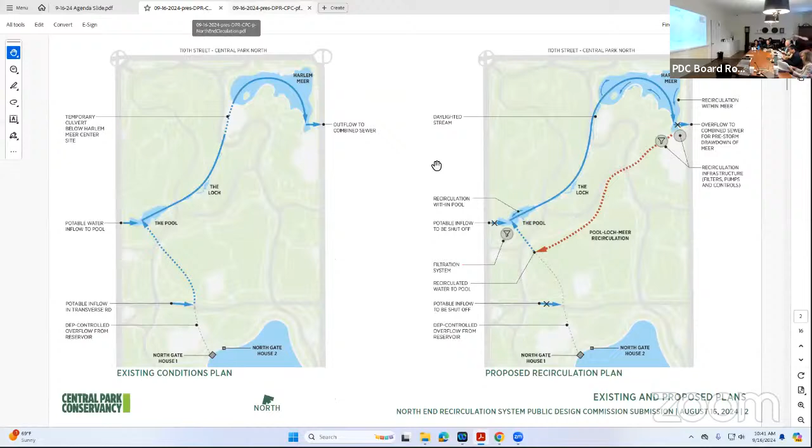Okay, we'll now continue with the public hearing portion of our meeting. The first public hearing item is number 28956, preliminary review of the construction of a water recirculation system, including adjacent site work south of Central Park North between Adam Clayton Powell Jr. Boulevard and Malcolm X Boulevard. Please note that this project is located at a designated scenic landmark, and as such, the Landmarks Preservation Commission has issued an advisory report, and the commission has reviewed and brought that report into our consideration. Per standard procedure, applicants will give their presentation, then public testimony will be heard, and then the commission will ask questions, deliberate, and vote. We will hear in-person testimony first, followed by testimony from remote participants.

We can now proceed with the presentation. Welcome. Good morning. My name is Diane Jackier. I'm the Vice President for Program Management at the Central Park Conservancy. I'm here with a few folks: Steve Bope, our Studio Planning Director; Sandy Huber, our Senior Vice President for Capital Projects; Nick Koster, our VP for Design; and Karina Bishop, one of our Program Managers. Online we also have one of our engineering consultants, Eric Rothstein from eDesign Dynamics.

So we're here to present to you the North End Recirculation Project, the first project we're going to be showing to you today. This is an incredibly exciting project that's going to be really impactful to the park. But once it's all done, most people probably won't even know it's there, because most of what we're doing is underground infrastructure.

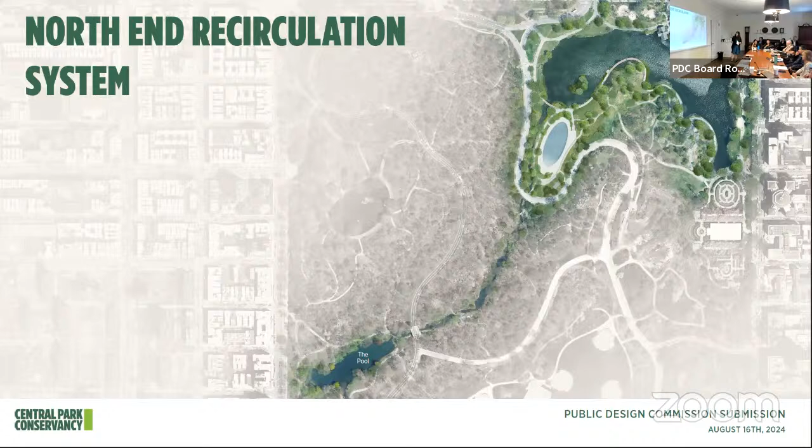To give a little history and background: the northern water bodies in Central Park, north of the reservoir, are the West 100th Street Pool, the Loch, and the Mere. Potable water comes in from the 97th Street transverse, and we also have water that comes in from 101st Street along Central Park West. The water flows by gravity through the pool, through the Loch, through the Mere, to a combined sewer on Fifth Avenue.

What we're proposing for this project is shown on the right side of the screen here, this red line. Through a system of pipes and pumps, we would pump the water instead of having it go out onto Fifth Avenue to the combined sewer—it would go back to a manhole just south of the 100th Street pool. It would again flow by gravity from the pool, the Loch, to the Mere, and just go around and recirculate.

One thing to note in terms of the history of this: what's amazing is from some of the annual reports from the Central Park Board of Commissioners, we have references to a recirculation system. Olmsted and Vaux were ahead of their time in so many ways that they were referencing an engine to recirculate and redistribute the water. Although it was never built, the idea was there.

The idea came around again in the early 2000s when the Department of Environmental Protection did a water quality management report. They were actually looking to do a recirculation system throughout the entire park. That did not go forward just because of cost and physical barriers in the park.

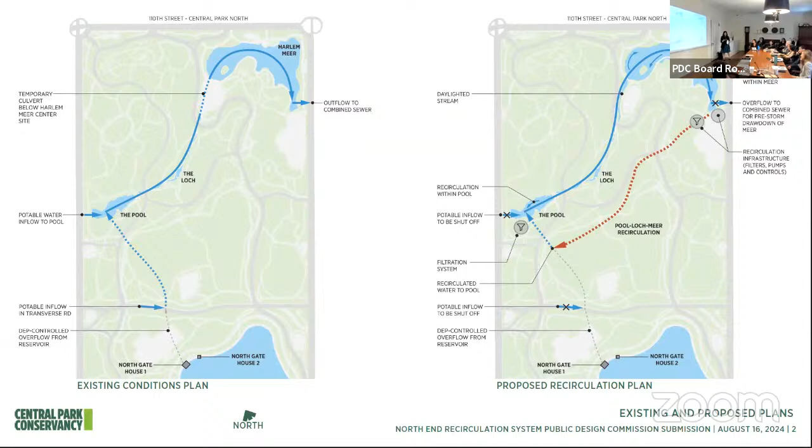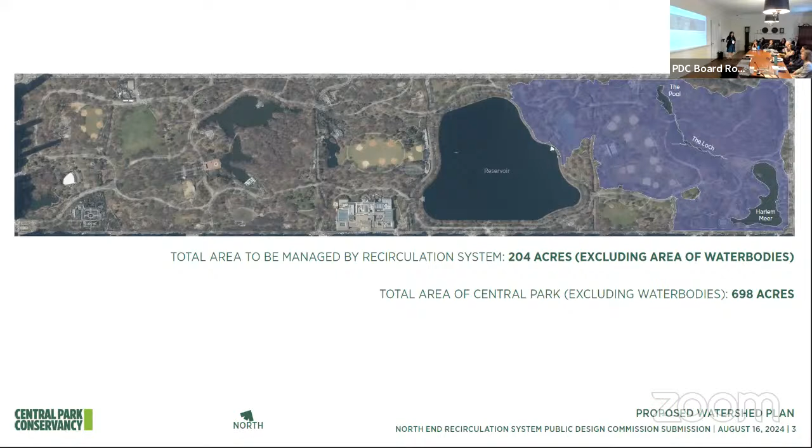One other thing: we are also going to be adding about 40 acres to the watershed here from the North Woods, about 22 acres, and right around where the Conservatory Garden is. So it'll be a total of 204 acres of stormwater that is going to be captured through this system, which is about 30% of the park's acreage.

Some of the projected benefits from this system are really impactful. We're predicting that we're going to save about 480,000 gallons of potable water a day. That calculates out to about 175 million gallons of potable water saved a year, which is pretty incredible.

Because of the system we're installing that will lower the Mere during wet weather, we're predicting we're going to save about 67 million gallons and have about a 90% reduction of water going into the combined sewer during wet weather events. This is really something we're hoping will improve the flooding in East and Central Harlem, and the models are showing that that's what it will do.

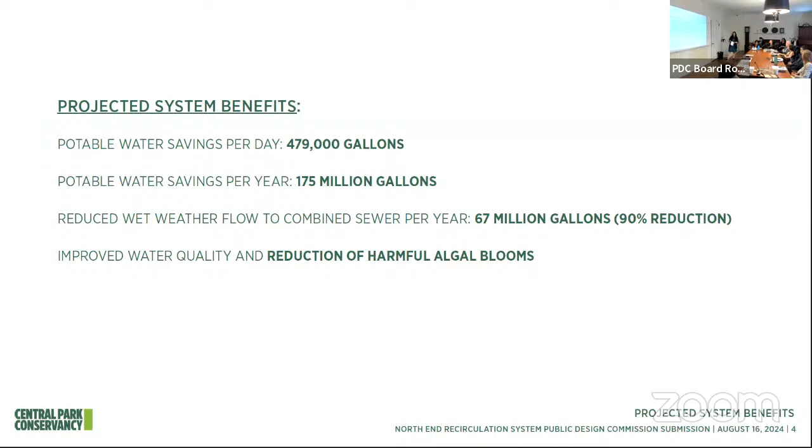Last, but certainly not least, we're looking for improved water quality and a reduction of harmful algal blooms, so we're installing those filtration systems in both the Mere and the pool. Because of the significant reduction in potable water, which has a lot of phosphorus in it, and phosphorus contributes to harmful algal blooms, without that potable water and that phosphorus we're also expecting improved water quality.

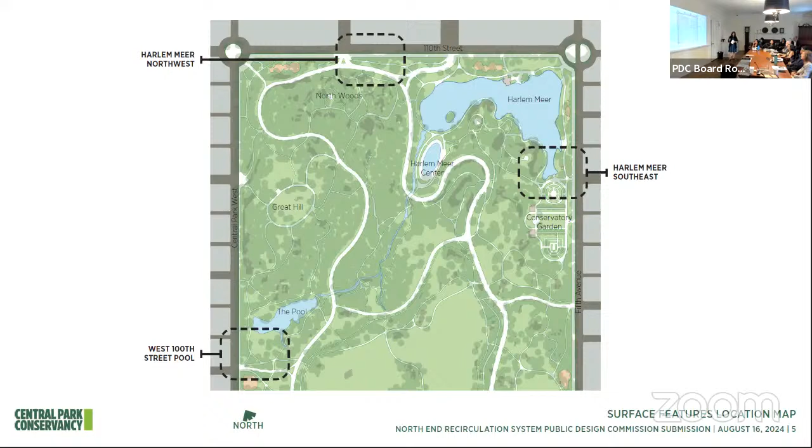Very quickly, as I mentioned at the beginning, most of the infrastructure here is going to be underground, but there are going to be a few surface area features. There's going to be some at what we're calling Harlem Mere Southeast, the Harlem Mere Northwest, and then by the West 100th Street pool. I'll just quickly go through those.

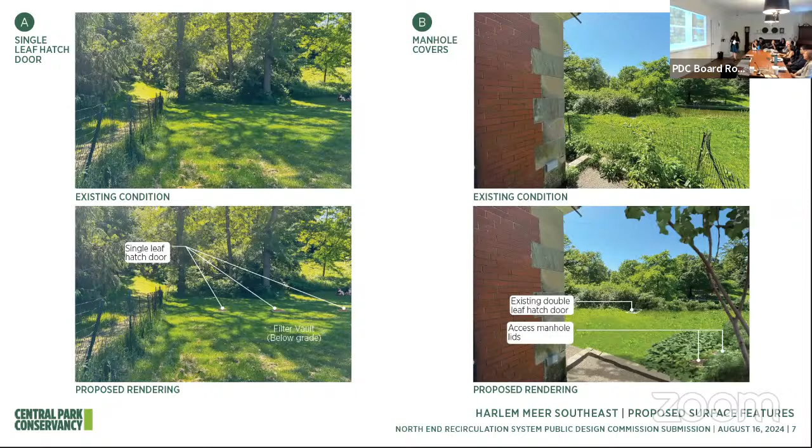So there's some hatch doors, some manhole covers. These are features that we see in the park every day. We are going to be concealing them as much as possible, and they really will be something that nobody notices when they're walking through the park.

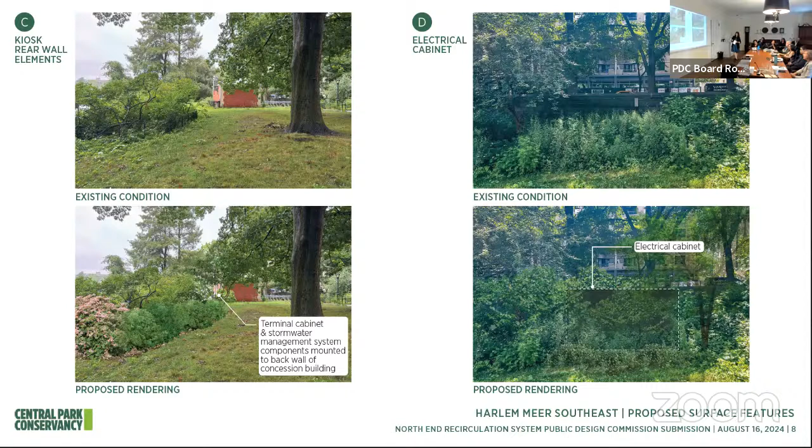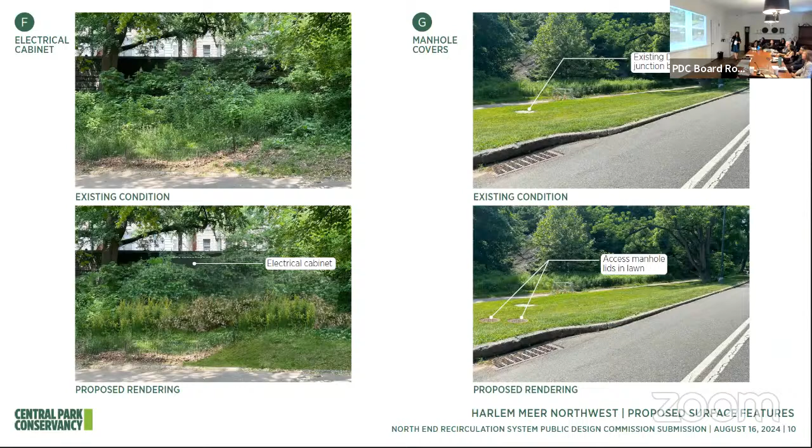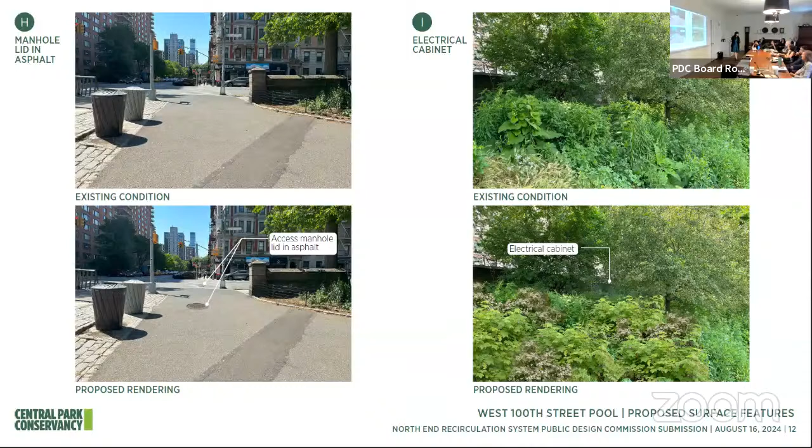And then close to the West 100th Street pool, we're going to have another filter vault underground. Some of the surface features people will see are manhole covers and an electrical cabinet, again pretty much not visible to the naked eye, and an RPZ leaf hatch door.

So just some photos of some of the plantings that we're also going to be installing as part of this project as well. And that's it.

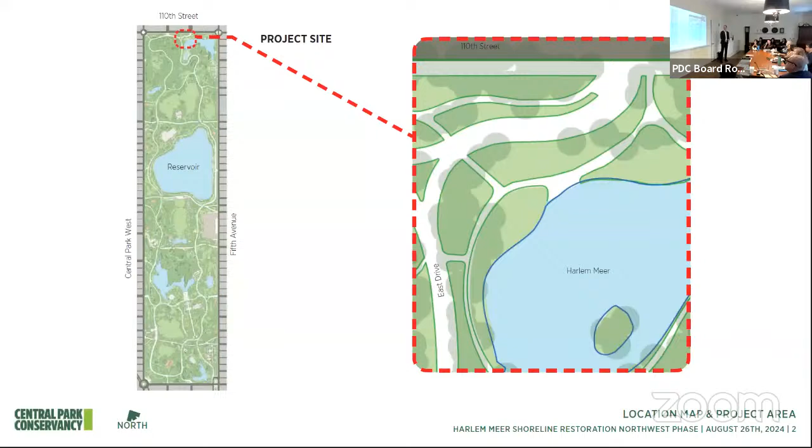As the name implies, this piece of the park is located at the northwest corner of the Meer. It's also adjacent to the former Lasker Rink, the current construction site of the Harlem Meer Center. So this is really to be seen as a continuation of the work that the Conservancy already has underway for this area of the park.

The center image that we're showing was taken a few days ago. You can see the water test that's happening for the filling of the new swimming pool. The project is moving along quite well, and we're excited that it'll be opening early next year.

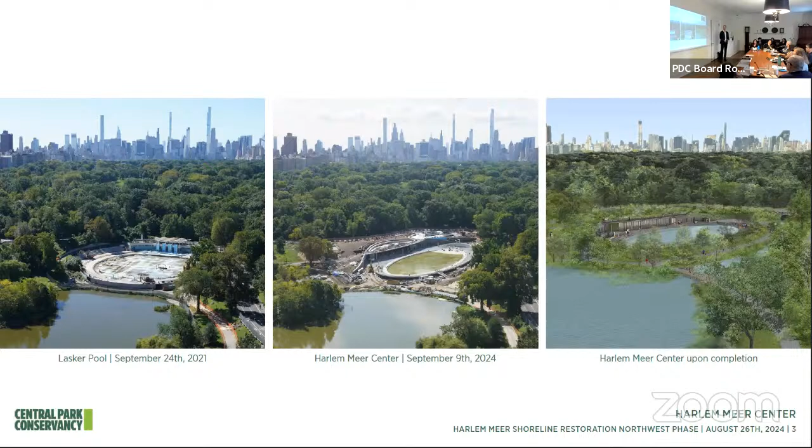The goals for this project are similar to the restoration goals of the Harlem Meer Center as well. We're really continuing to restore the shoreline to its naturalized edge. We will be supporting wildlife habitat and creating accessibility around the entirety of the Meer as part of this phase of the master plan project.

The area of the Harlem Meer in the park is an area that Olmsted and Vaux had advocated for adding to the original plan of the park, from 106th to 110th Street. The reason why was for its unique natural features, the ability to create the Harlem Meer being one of them. The photo on this slide shows what this area of the park historically looked like.

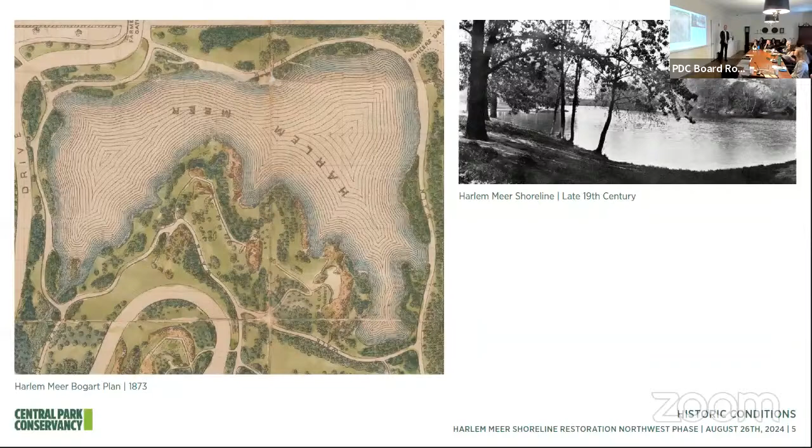Over time, through the 20th century, this was an area that had a lot of Parks Project interventions: the hardening of the shoreline, the addition of a wall, the creation of the boathouse, and the extension of the shoreline path around the southern edge of the Meer.

This was an area that in the 80s, like most areas of the park, had fallen into great disrepair. It was one of the areas that in the early years of the Conservancy took on for design and restoration. In the 1990s, this area underwent a huge transformation. The shoreline was naturalized, the paths were restored, the old boathouse taken down, and the Dana Center was created.

As it is 30 years later, across the shoreline, we have phragmites that have established at the edge. The paths are in need of repair, so now is the time to come back and work through restoring the entirety of the shoreline.

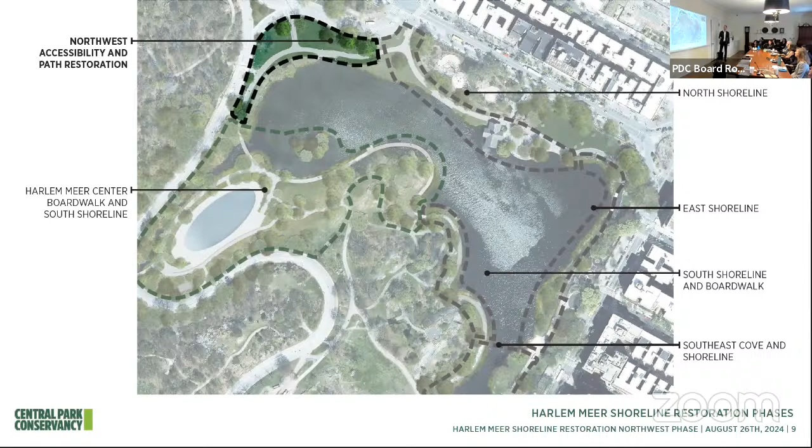This slide shows the Harlem Meer Center, the project that's currently underway, outlined in light green. As mentioned, it'll be a phased project. We see the Northwest Accessibility and Path Restoration as being the first of 5 phases of work that will proceed as funding becomes available around the Meer.

In terms of accessibility, this piece we're sharing today will be connecting and creating accessible paths to the Harlem Meer Center, as well as up to the 110th Street Playground from the drive, and the park entrance here. When the master plan is complete, we'll have accessibility created to the entirety of the program surrounding the Meer.

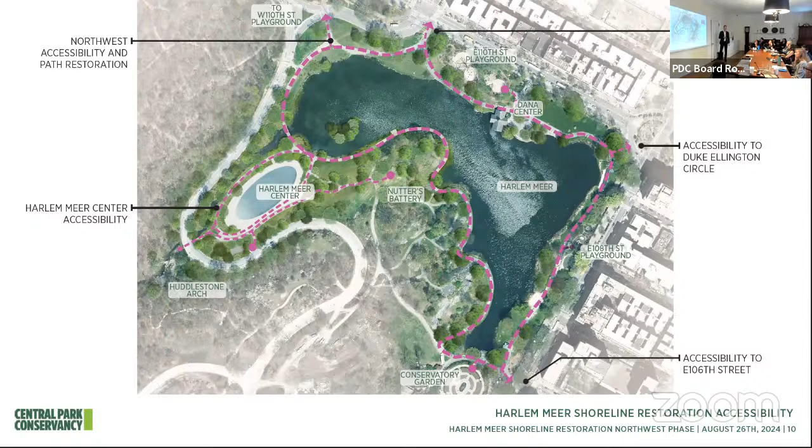We have a few existing condition photographs to walk through and show what the space looks like prior to the Harlem Meer site going under construction.

We'll be talking about the staircase, this path here, and the replacement of this path in its entirety, as well as the relocation of light fixtures and some of the benches. The proposed plan here, with the previous plan that we were just looking at highlighted in dash line.

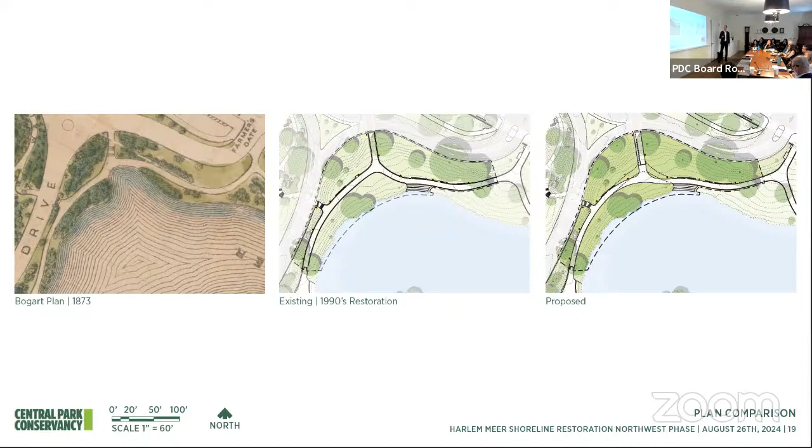There's a very mature, large oak tree whose drip edge is within the limits of that path. So we're doing very minimal regrading of that path in this location and adding our accessible ramp with rails to the western side of that. That's where we'll be working with the grade to achieve accessibility.

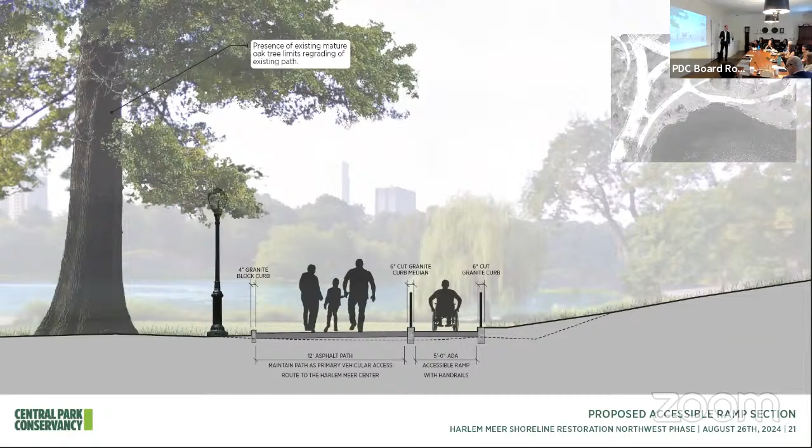Additionally, the stair that was mentioned was installed as part of the 90s work. It's settled, and some of the treads are of varying heights. So as part of this work, we'll be adding new granite stairs and handrails to those, allowing access from the drive down to this path that leads to the Harlem Center.

In terms of the materials palette, we'll be using granite steps here with black painted handrails, very typical to what the Conservancy has been using on restoration projects.

The asphalt paths will be replaced with new asphalt paving with either vertical or flush block granite curbs. The benches will be replaced with the settee bench, typical to what's been happening in the areas in and around the Harlem Meer.

And that is the extent of our presentation. Thank you.

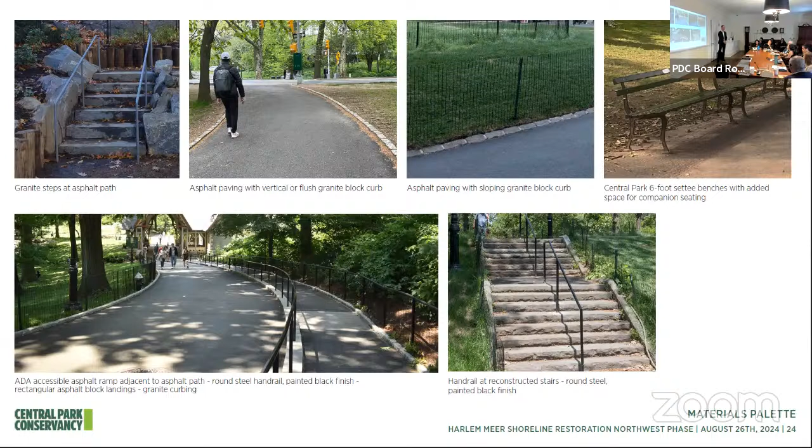Got it. So the wider path, what would be the final condition once this renovation is complete? Sure, it's also around 8% with no landings. Okay, so it's more about the landings and the handrail and not being able to meet ADA guidelines to allow a vehicle. Correct, we weren't able to get it to 5%. Got it, okay, we just weren't able to pull it out far enough to achieve that.

Okay, that answers my question. Thank you.

Okay, any other comments or questions? All right, thank you, Nick, for the presentation. Thank you also for considering our comments around the path, and we are pleased, I think, as Isabel said, with the resolution that you have now.

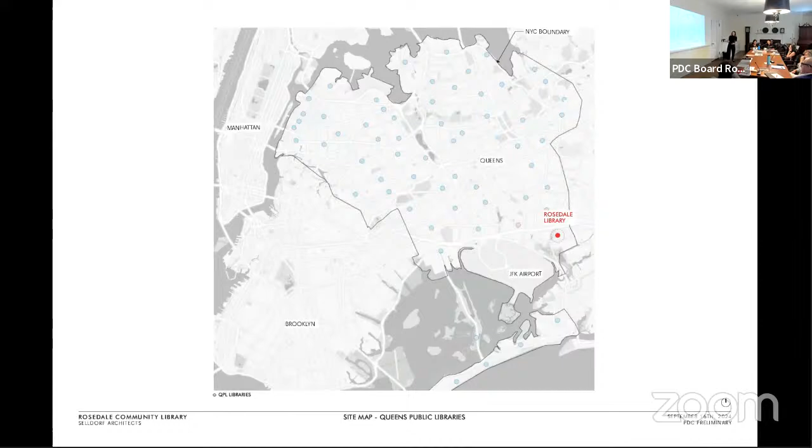As many of you know, the Rosedale Library is located on the southern edge of Queens within the Rosedale neighborhood. Here in a close-up, the neighborhood is predominantly residential, built up of 1- and 2-story buildings. The library is located on the northwest corner of 243rd Street, which is the commercial thoroughfare, and 145th Avenue, which is primarily residential. The library sits adjacent to a vacant lot, where we are proposing to add a new 2-story addition of approximately 6,000 square feet. The project also includes renovation of the existing library, which is about 5,500 square feet.

This library is currently insufficient in square footage to provide all of the required educational and community programs that are very much needed for the community.

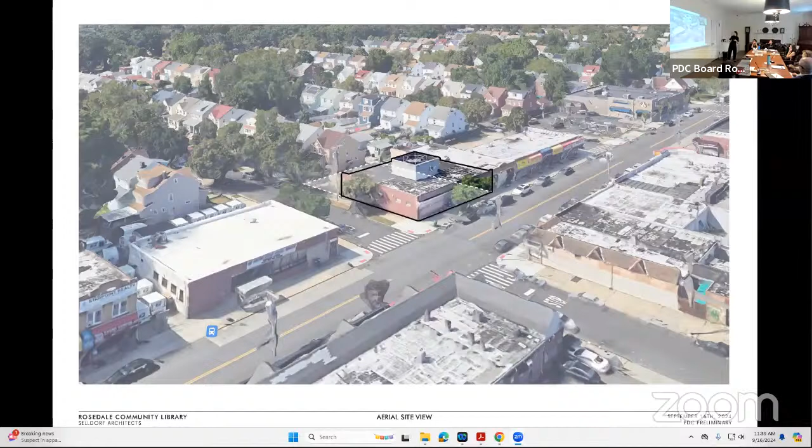With the mechanical penthouse? We're planning to relocate that mechanical penthouse to the roof of the new addition, and that way it restores the existing condition of this nice modernist building.

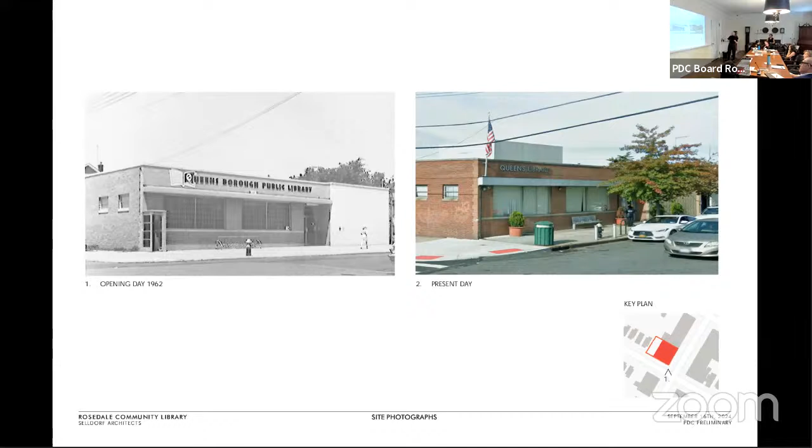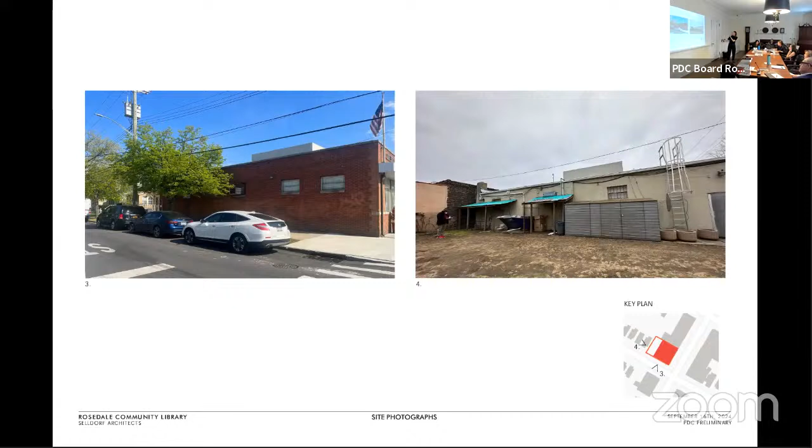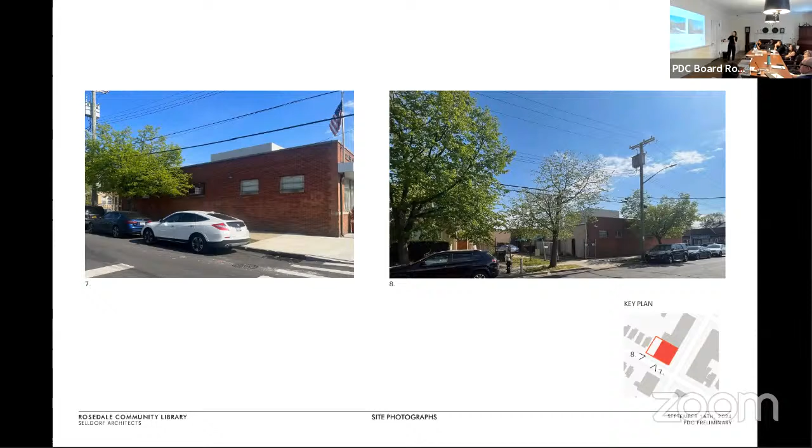Here are additional photos from the side yard looking at where the new addition will be. This is our simple zoning analysis, just to note that the new two-story addition fits within the zoning envelope and will be as of right, requiring no variances.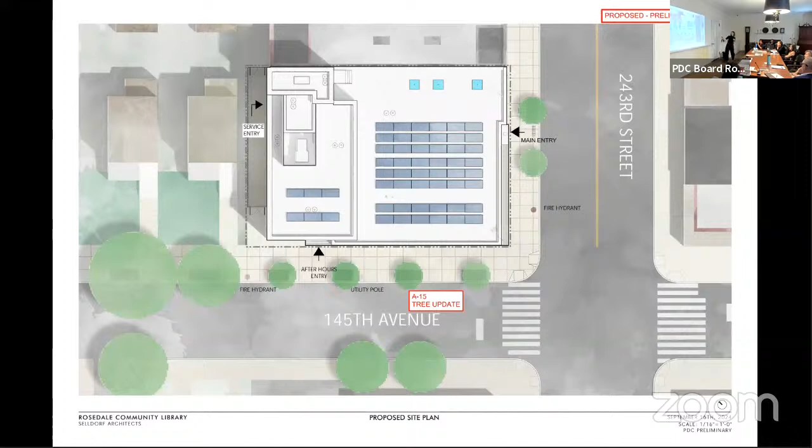This is just a very minimal landscape scope on this project, consisting of two new street trees. For the program of the building, you can see that the reading rooms and the majority of the public amenities will remain on the ground floor, and the children's reading room is pushed up to the second floor.

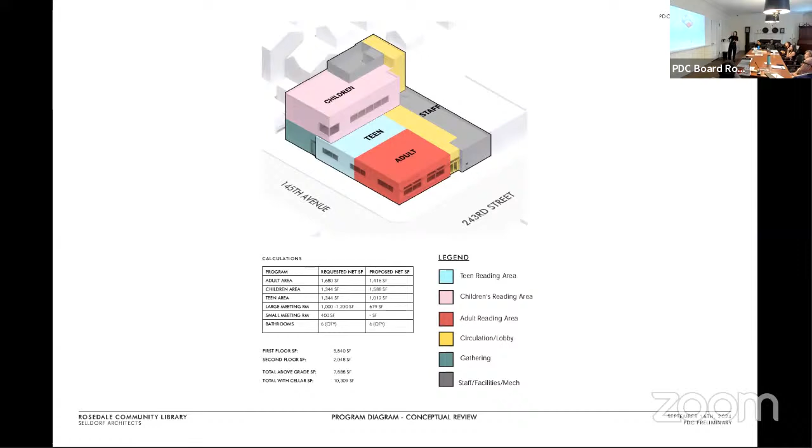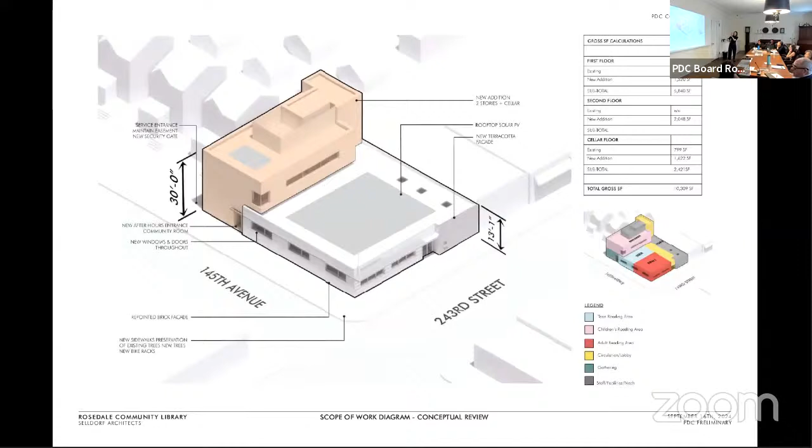A slight update for the preliminary. Here in the massing study, you can see how the new two-story addition interlocks with the existing building. And here is just the updated version.

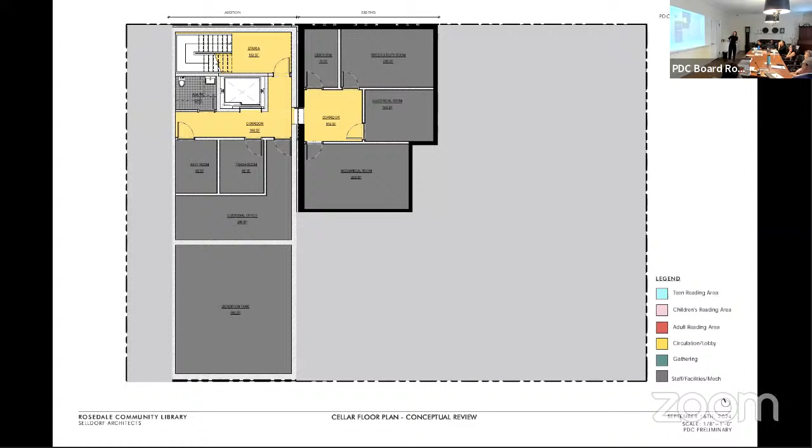This leads you to the existing cellar floor plan, which was very compact in the current library, consisting of just a staff room and a mechanical room. With the new addition, the floor plate below grade is greatly increased. And here's the current plan.

The mechanical rooms will stay in the cellar, for all of the building systems, as well as including the code-required detention tank, which takes up lots of square footage. We'll have expanded custodial offices and all of the things that will bring the building to become more modernized.

A lot of renovations try to take mechanical rooms out of the cellar now because of sustainability, flooding, et cetera. So I'm curious, as long as you're going through all of this, why you're not considering that?

Oh yeah, Shuchi, you can speak to it. I'm no expert, but this is actually a very interesting question, because they added a new mechanical system, which is a traditional unit up at the top. We want our building to be LEED Gold, and we did a variety of studies to see which mechanical system we could tap, and we've settled on geothermal.

So geothermal pipes will actually be under the new building, and the pump room for that, which will then pump the water up, is right where the mechanical room is. So it's better for it to be closer to the geothermal pipes, and then it's really just the water that's going to go up.

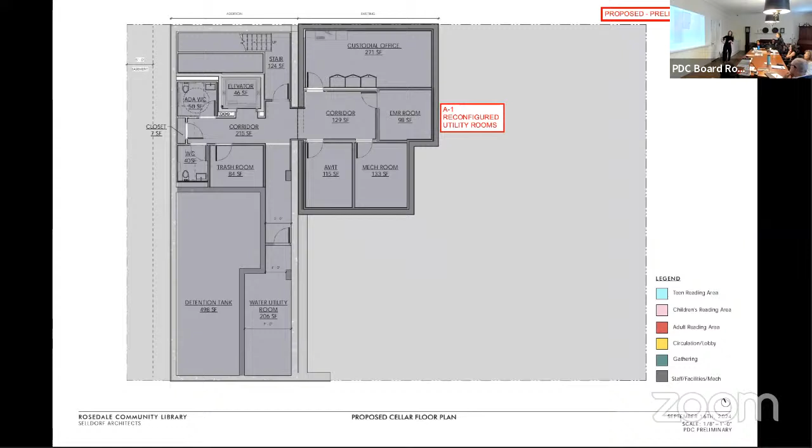In the new project, the adult reading room will be greatly expanded, and we'll now be able to provide a dedicated teen area. The multi-purpose and meeting room is also greatly increased in size and has a dedicated entry, as you can see in the yellow down below, that connects you to 145th Avenue for after hours. There are expanded staff areas now on the ground level, as well as facilities for the public.

As you enter through the main entry, as seen in this yellow swatch here, you enter into this circulation spine of the building. It was important for us that as you immediately enter, you have this visual connection to the new addition, so it very easily leads you through the building. If you're on your way to the multi-purpose room for a community event, or going upstairs to the children's reading room, that's very easily accessible and good for wayfinding.

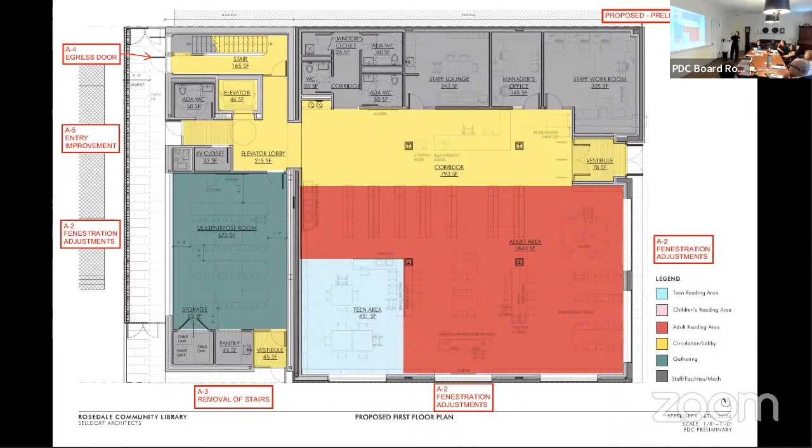And then the roof level here and here. As you can see, a portion of the mechanical system is relocated from the existing roof level up to the roof of the new addition. We're also planning to incorporate an array of solar panels.

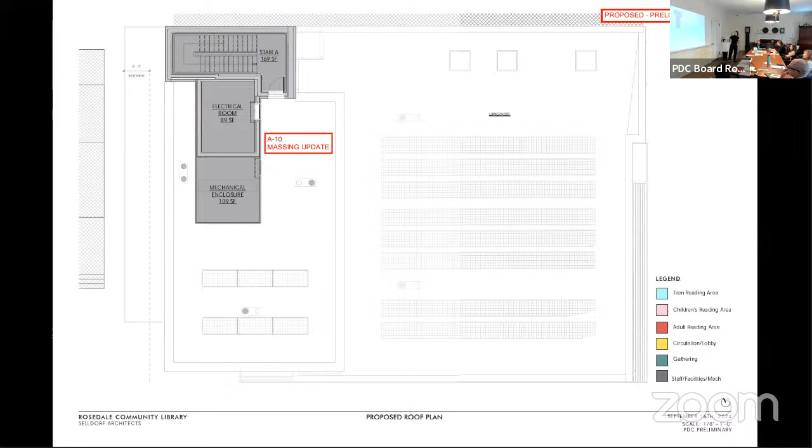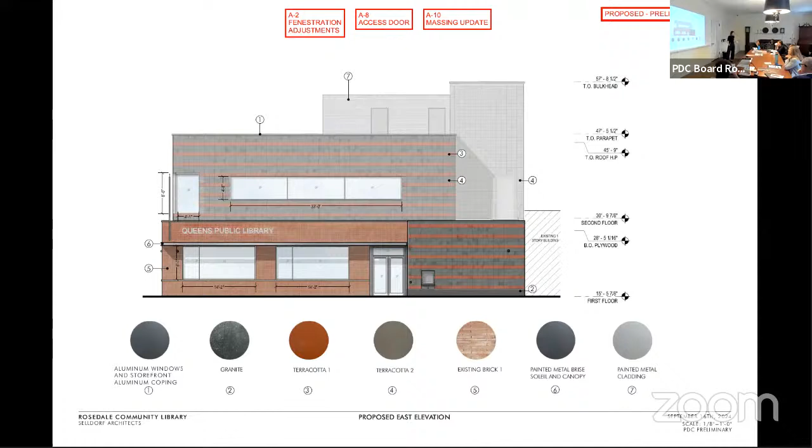Okay, and the existing south elevation with the very tiny windows here, and the proposed from concept, and here with the materiality. So it was important for us to obviously make these windows on the south elevation much bigger. These look out into, they're facing south, they look into the adult and teen reading rooms.

Again, highlighting within the terracotta wall, you see the after hours entry led straight into the community meeting room. And again, a continuation of the solar shade as you see it wrap across the existing brick facade and around the corner to the front. The terracotta also does a really nice job here of bookending that existing brick building.

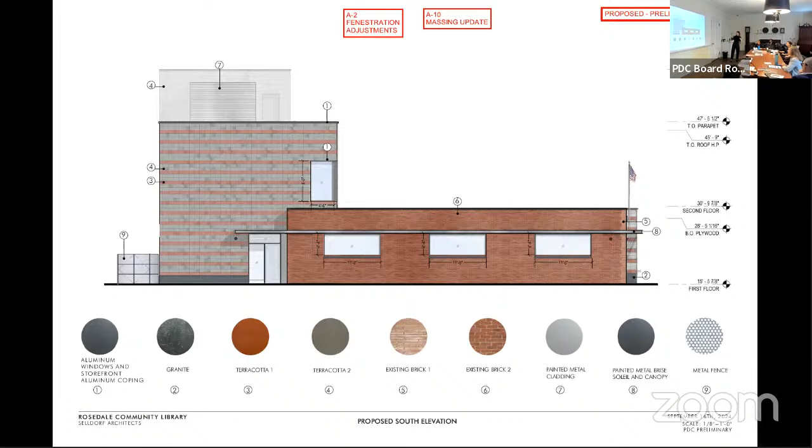Here's the side yard today with the utilities, and then the proposed addition in the side yard, and here with the materiality. Since the last submission, we have again also increased the sizes of these strip windows, and we've added 2 new additional windows into the stairwell, as we thought adding light in there will help animate the space as the children march up the stairs to their reading room.

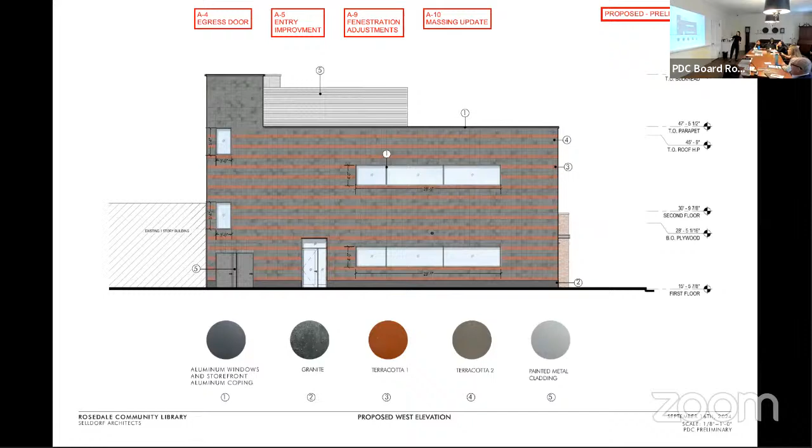And then here is just to show this is an existing section east-west. The existing building within the reading rooms has a very low and constant ceiling height. In the proposed here, we have very carefully and diligently gone through to try and consolidate all of the building systems and the structure and everything to try and get these ceilings as high as possible. So you can see that effort here in the coffered ceiling area, and then the ceilings in the new addition are also much higher. So we hope that will make the rooms feel lofty and bright.

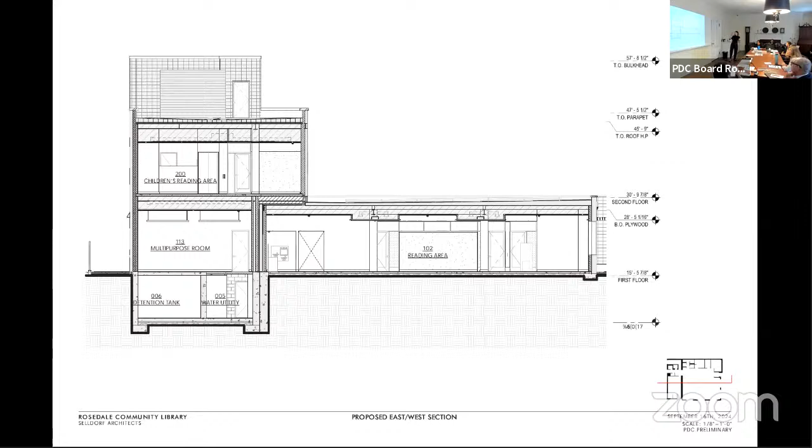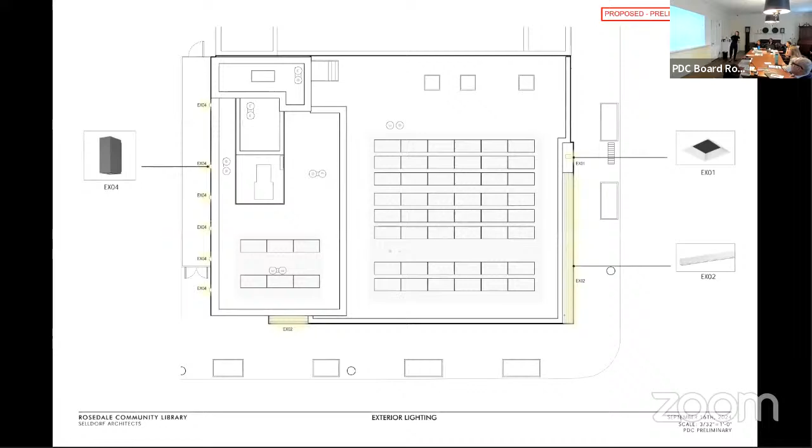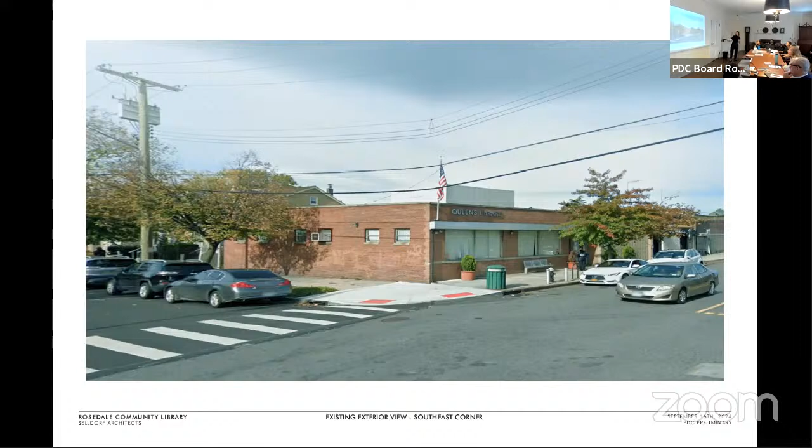We're very happy, and Annabelle is very happy with the outcome of the design at this point. Annabelle Selldorf, my boss, we're all very pleased with how this is shaped up. We're very happy with how the terracotta frames the existing brick building.

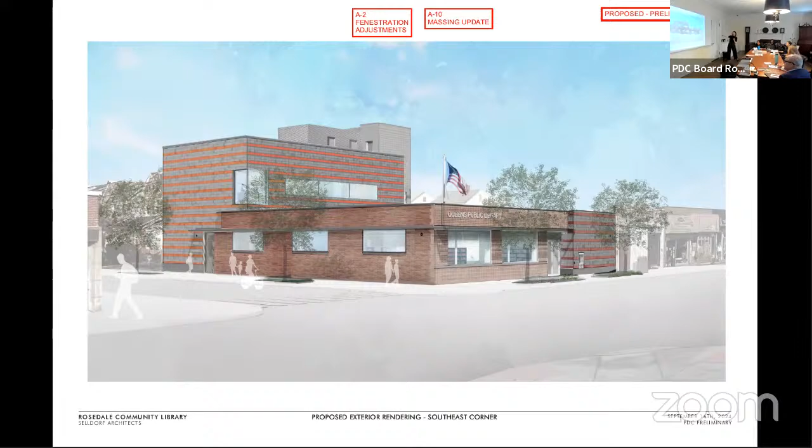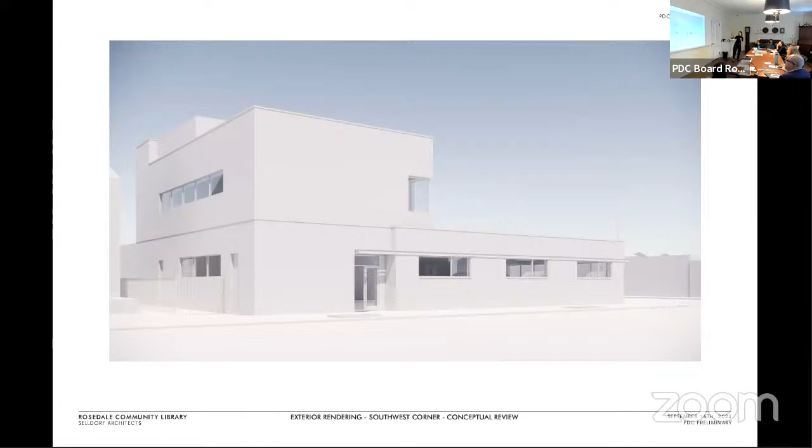I also just want to highlight briefly the continuous solar shade, which connects the two entries to each other. And again, here's moving on to a view from 145th Avenue, that more residential side street. This is the massing from the concept.

And here's the proposed two-story new addition. For the material palette, in addition to the terracotta, we're planning to install a granite base below the terracotta paneling at the new addition. And then just also to highlight, all the windows will be a simple aluminum frame window.

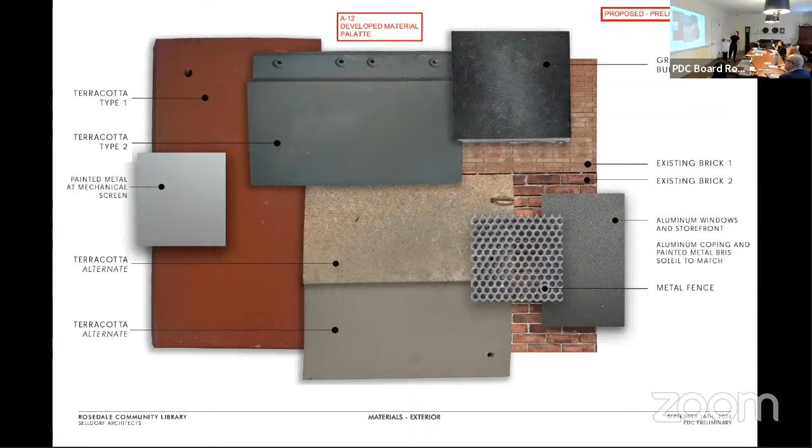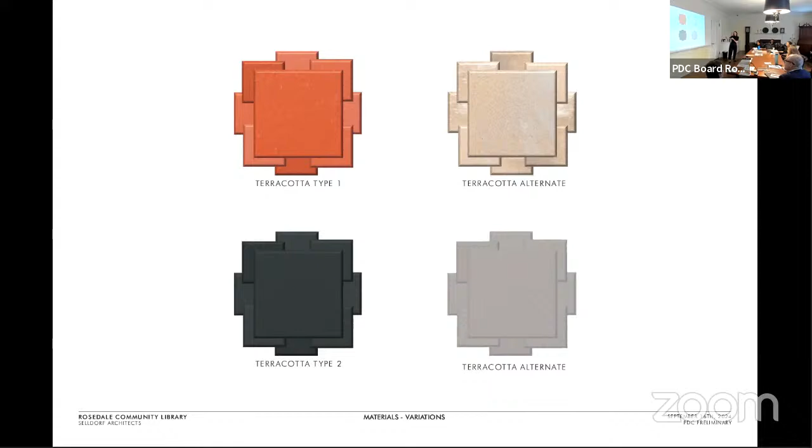This slide is merely meant to demonstrate that the terracotta in general will not be a constant color. It has a natural variation due to the firing process within the kiln. We really love that feature about terracotta, and we love to use the product all the time. So that's difficult to represent, but we did our best.

Here you can see a section perspective into the new library, which hopefully will feel more transformed, with the raised ceilings, the increased size of the windows, the lofty spaces, the extra square footage, and it should hopefully help support all of the desires of the community.

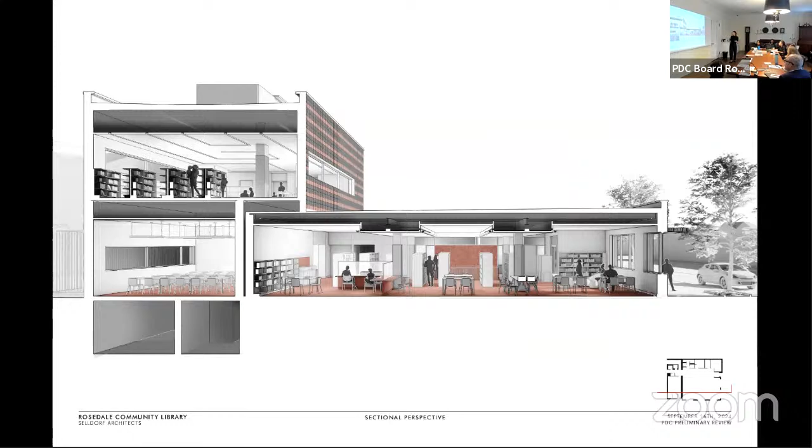And then one quick interior view. This is immediately as you enter through the main entry of the building—you have the collection on your left, the service desk on your right. You can see that visual connection back to the new addition to very easily bring you to that community meeting room or to the upper floor to the children's reading room.

Where's the front door? The front door is right behind me, here's the vestibule. So you're in that circulation spine of the building to the north—you have the staff on the right and the collection to the left. Oh, so south is this way? Right. I was thinking I don't see it—oh, it's behind you. Right, but the connection to the back, that gentleman in the front...

He's looking at a computer maybe. No, he's looking out towards the one who's walking. Oh, he's walking, yes—so this is the new addition right here. Right when you walk in, it's very easy wayfinding. You can see the two reading rooms, and back where he's walking towards, down here. Got it, so he's sort of walking towards that community meeting room. There'll be appropriate signage, not yet represented here. Just to the right, you'll have the new elevator and the stair that takes you up to the second floor.

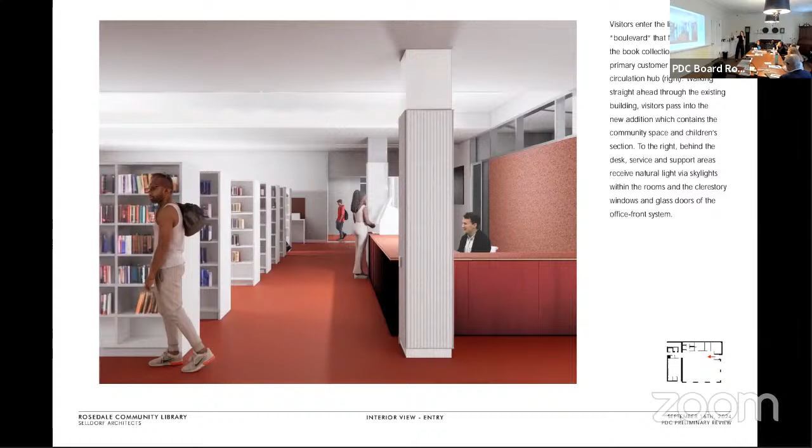And then here you're in the front of the building. Just as you walk into the main entry, you turn to the left and there'll be a nice little lounge area, an extension of the adult reading room, with increased window sizes, lots of daylight coming in, raised ceilings, and indirect lighting. We're hoping all of that makes this space feel very welcoming and pleasant for the community to take advantage of, and really spend some quality time in the library.

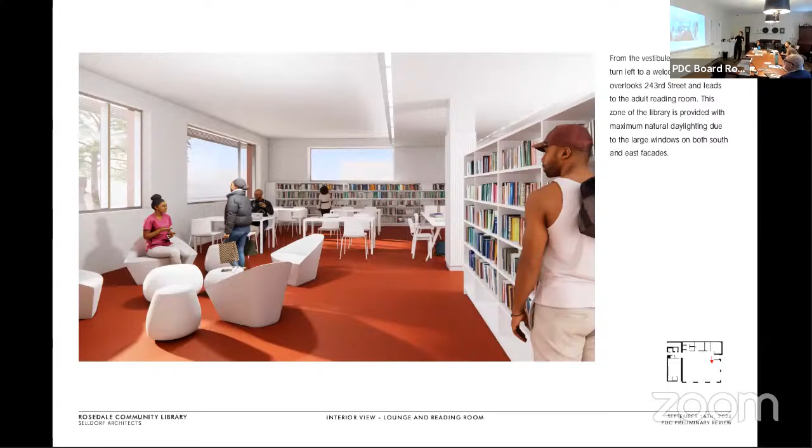This is a very quick study because there have been lots of questions about the color of the terracotta, so we recently took all the tiles to the project site. This is the existing wall on 145th Street, or 145th Avenue, and these are the current proposed red and gray tiles. We have a number of slides showing all the alternates up against the existing brick, showing that varying tone.

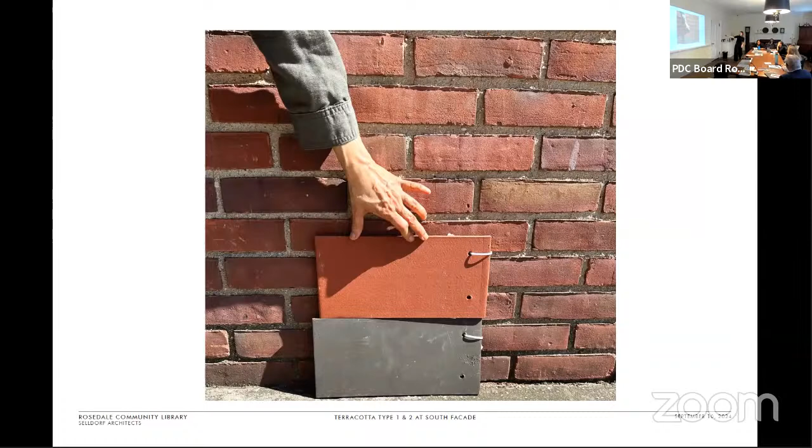We're very happy with how this is coming together—we feel these two materials are very complementary to each other. I'll just click through them. Susan, we're looking at these two, correct? Yes, so there's these two. We did have a few other ones, but there was another shade of red that I'm realizing you don't have—sorry, go back.

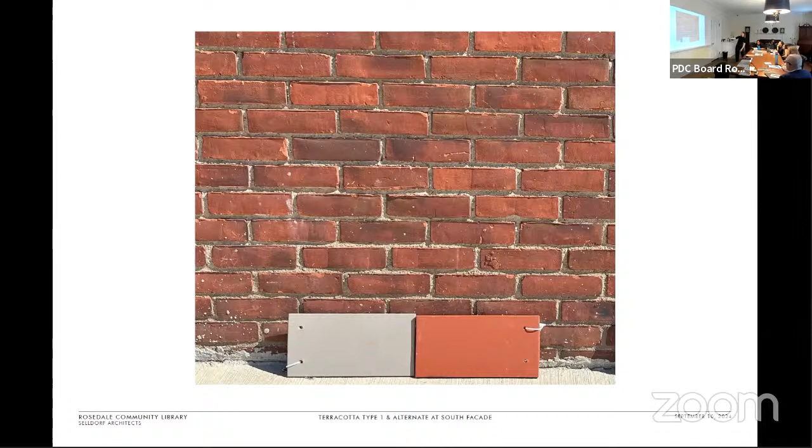That lighter gray is this one. And then is this the lighter red? No, it's at the end. Oh, this—well, so there were two shades of red we were studying, we're debating between the two. So this is the darker red, and then this, a little hard to see in the photo, is a paler, lighter one. We don't have it here.

You don't have the sample here yet, but we can certainly get that for you. I'm confused, which is the one you're thinking of going with? This is the current proposed one, not the ones you have on the table. This was a study we did as we're still evaluating the color, but as of right now, this is where we stand.

I think we've moved away from this texture, we prefer this sort of smoother tone. But again, all of the tones of this terracotta, it's difficult to show in the rendering the variation, so you kind of have to use your imagination a little bit.

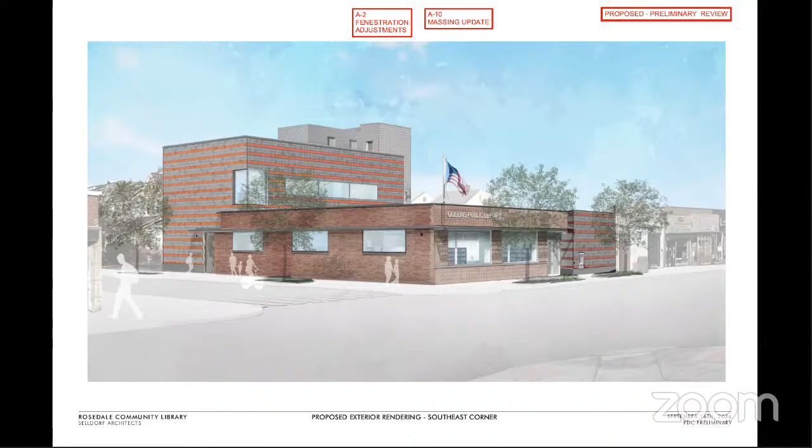Hang on one sec, Lori, we need to adjust the volume, we can't hear you. Can you hear me now? Lori, you're a little muted in the volume, you want to give it another go? Lori, we still can't hear you. If you want to text me or email me your comment, I can deliver them, but we can't hear you, it's coming out of that speaker. It's very difficult on the Zoom as well to hear you, unfortunately.

Okay, she's going to call in via telephone, but until then, I guess I will ask if other commissioners have any comments or questions. I'm so happy about the second building, it will make such a wonderful change in the footprint of the library usage, huge. That's really wonderful, it's so much extra space.

I have a couple of questions. Thank you for the presentation. I think the building massing is very simple and speaks very well to the existing building, and I think that's very successful about the project. I am curious to understand the thought process behind choosing terracotta and choosing the striping pattern as opposed to brick or any other type of material.

It's definitely super helpful to see the colors against the brick because you understand the association, but just backtracking to a bigger concept, why that material, which is very different from brick, and why the striping?

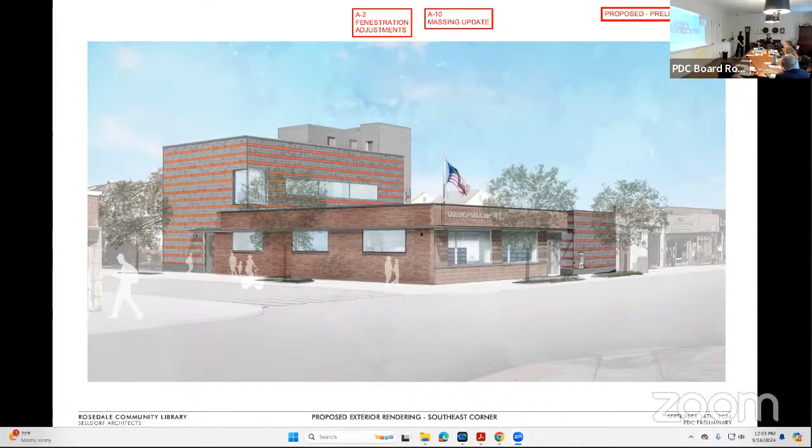We wanted to connect to the existing building, but still have the new addition feel modern and contemporary. So if you look, our detailing at the corners is not going to be like brick detailing. We're actually going to have metal corners that will make it more crisp, almost minimalist, like a panelized system, but somehow it still connects to the brick. So that was our thinking of using the terracotta.

So in a way, the terracotta is speaking to the tectonics of it, as opposed to the brick, which would have been structural. Right, that's the rationale. Got it, thank you, that's helpful.

Yes, I will get them, but why don't you go ahead and finish? Sure, well, thank you again for the explanation.

I do think, when I first saw your renderings, the picture of the terracotta felt a lot darker than the brick. I appreciate you going out there and taking photos against the brick, because it's a lot easier to see the relationship. On your photos, something important to note is that the dark gray, which looks very dark here, looks much lighter there. I would assume this facade is very exposed to the sun, because all of the massing around it is very low, so that should diminish the contrast we see here and make it look a little bit flatter. I think all of that is super helpful.

I understand the use of terracotta, and I understand the tectonics you're mentioning. Those make a lot of sense to me. I don't love the stripes, that's my own personal opinion, because I'm not sure the building needs to be so graphically expressive. With the detailing and material choices, you're already doing something very elevated, elegant and contemporary against what is a pretty standard looking building. The striping, to me, perhaps distracts from what could have been very beautiful detailing. But that's just my own personal opinion.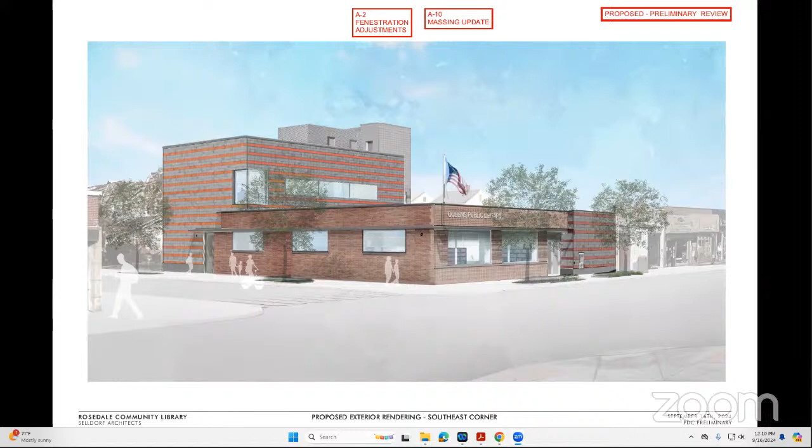Commissioners, any additional questions or comments? Okay, so just to summarize, first, thank you for answering our questions around the materials and the color palette, and really appreciate that. We are very excited about this addition for the Queens Public Library, and know it will be greatly treasured by the community. We find the striping very playful and successful ultimately.

With that, I'll take a vote on this submission. Commissioners, when I call your name, it's item number 28958, please state your vote. I want to note that while I stated prior to your presentation that we would have to recommend this for the next meeting as a consent agenda item, now that we have Commissioner Hines here, we do have quorum, so this vote will count. So with that: Isabel Castilla, approve. Bill Heinzen, approve. Karen Keel, approve. Carrie Maloney, Meryl Tisch, and I also approve, so let the record show approval is unanimous, and congratulations on a wonderful addition to our libraries.